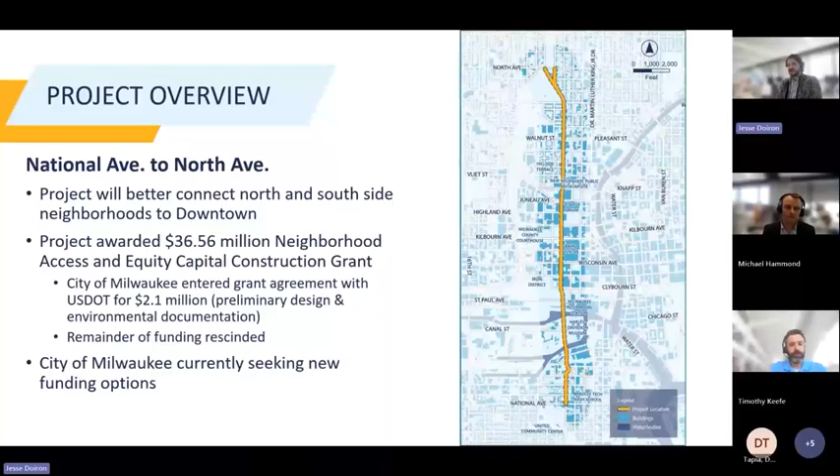So a quick overview of the project. This is 6th Street from National Ave to North Ave. The project will better connect the north and south side neighborhoods to downtown. Initially, this project was awarded a $36.5 million neighborhood access and equity capital construction grant. However, the City of Milwaukee entered into a $2.1 million grant agreement to cover preliminary design and the environmental documentation. However, as part of the big, beautiful bill that passed last July, the unallocated funding was rescinded, and so we are just finishing the design process with that $2.1 million. Once we get to that 30% design, the City of Milwaukee will look to find other ways to fund the project as it moves forward.

This is called 6th Street Next. We're using the past and the present to now inform the future. So here we have a picture of 6th Street then. We have 6th Street now, and then we're looking forward to 6th Street next.

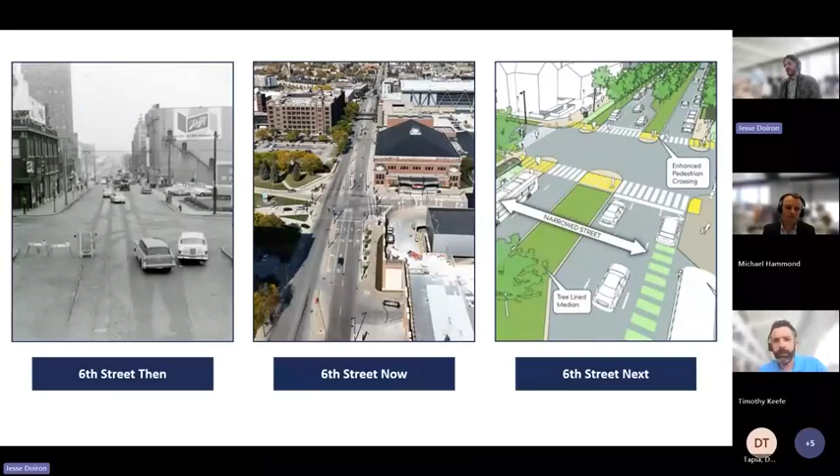The project features: we're trying to improve pedestrian accommodations, add new transit lanes and enhance stops wherever feasible, fully separate bike lanes wherever feasible, increase the tree canopy, landscaping, and other green infrastructure. We want to right-size the roadway and do complete pavement reconstruction for a portion of the corridor.

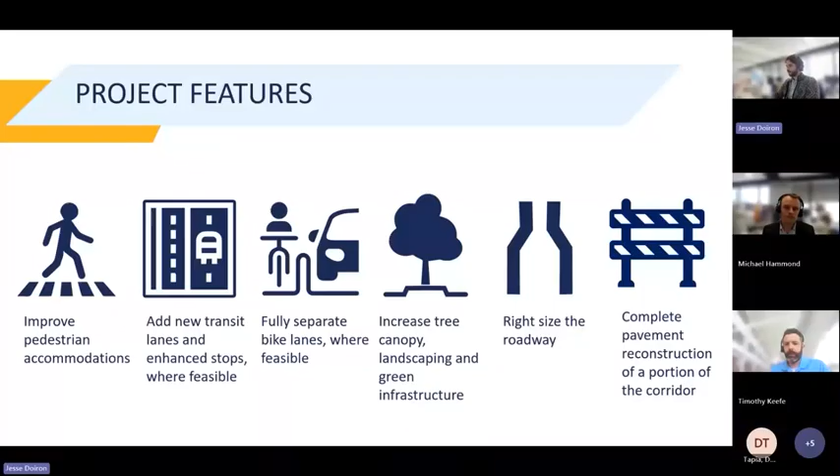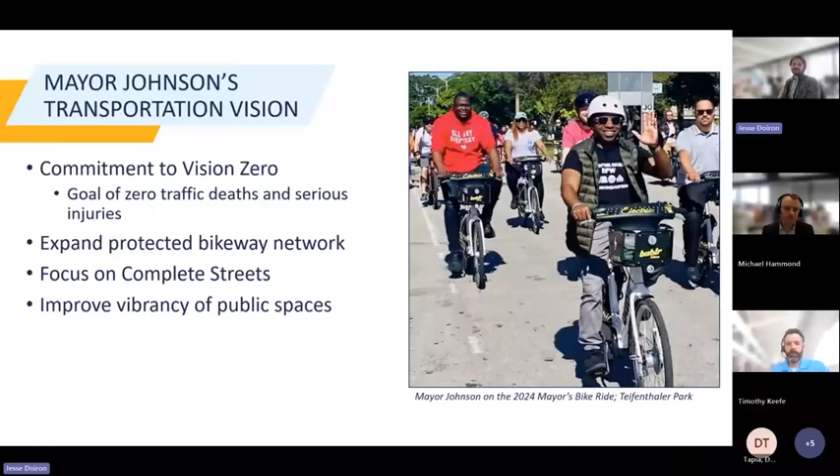This is part of Mayor Johnson's transportation vision and his commitment to Vision Zero, a goal of zero traffic deaths and serious injuries in the City of Milwaukee. We're also supporting the vision of expanding the protected bikeway network, focusing on complete streets, and improving the vibrancy of public spaces. This project comes out of the Connecting Milwaukee Downtown 2040 plan.

It was identified as one of the catalytic projects, turning 6th Street into a complete street, which would be redesigning it as a priority transit and enhanced bikeway. Throughout that process, residents supported designing streets that are walkable, safe, and have more space for people walking and less space for vehicles. It's been identified on the bike priority network and the transit priority network.

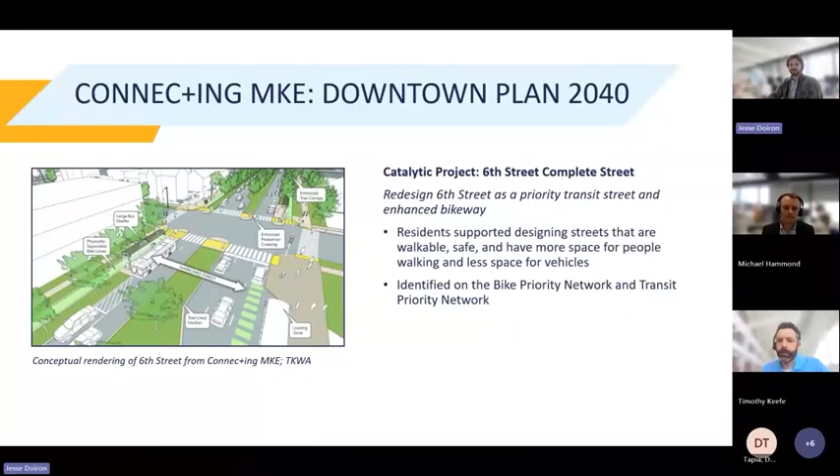So this is our second round of public involvement. In our first round, we have a brief summary of what we heard. We engaged with stakeholders both at the City of Milwaukee and with MCTS.

We heard that the corridor is not cohesive, but it does serve a variety of uses and users. There's a lot of potential throughout the corridor for identity, gateway, and gateway signage. And then certain intersections feel very large, especially Michigan, Kilbourn, and McKinley.

We engaged with a variety of stakeholders along the corridor, including the Baird Center, Downtown Milwaukee, MATC, the Nature and Culture Museum of Wisconsin, Walker's Point Association, just to name a few. And what we heard repeatedly is that 6th Street is a barrier for people that are walking, so better crossings are needed. Corridor would benefit from pedestrian wayfinding signage, and this corridor serves as an important access point for large events, for deliveries, and for customers.

A brief summary of the engagement we heard from our first round of public involvement meetings is that 6th Street is an important artery to move people through the city, but the street feels unsafe. Vehicles move too fast and the pavement quality is poor. So using that information, we moved through a selection process and the preferred alternatives.

So I'll pass it over to Mike to go over how we selected our preferred alternative.

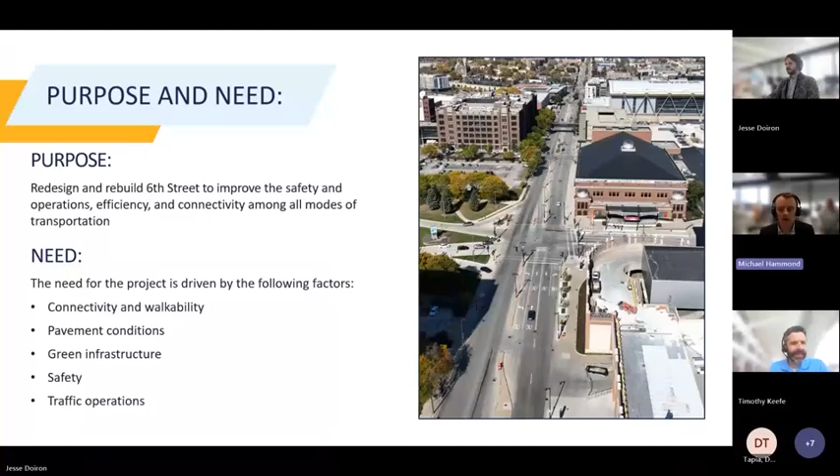And then finally, traffic operations, certainly acknowledging that this is a roadway with vehicular traffic on it, and across the different segments of the roadway, there is different jurisdictions of who maintains the jurisdictional operations of that roadway, and that's something that we've also been keeping in mind as we evaluated the various alternatives.

So we've talked a little bit, as you've heard me mention segments a couple of times already. The way we've thought about this project, both at the first public meeting and in this second phase of public engagement, as we looked across different alternatives, was really dividing the corridor into 4 segments, starting at the far southern end from National Avenue to the roundabout as the first segment.

And then you see that purple segment in the map, roundabout to Clybourn Street being the second segment, then red Clybourn Street to McKinley, and then the final segment to the north, McKinley to North Avenue.

As Jesse notes here on the slide, there will be Q&A. So basically after each section, what we'll do is run through the alternatives that have been proposed, where our preferred alternative landed, and certainly time for Q&A. Jesse notes the virtual comment form on our website.

And then I'll also note that on that same website, we did host an in-person public meeting last night. For those of you who weren't able to make that, we do have materials from that public meeting also available on the website for review that mirrors some of the info that we're sharing in today's presentation.

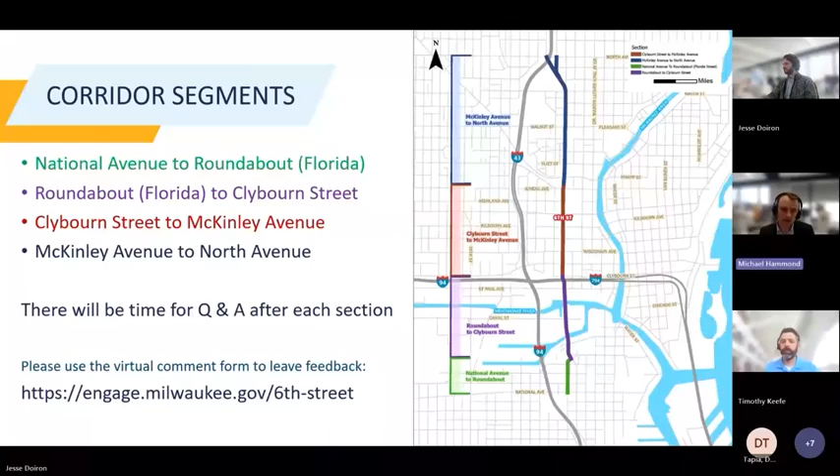Both of those speed stats are really likely influenced by the surrounding context and land use of this corridor, as it is somewhat different from the other segments that we're looking at.

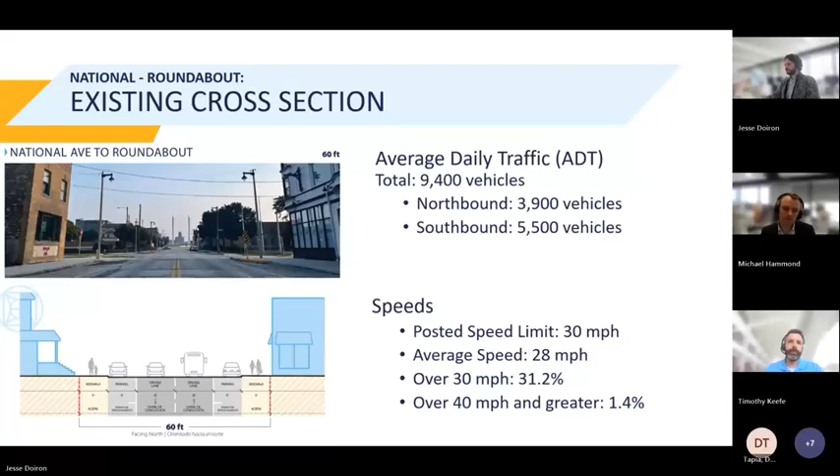So when we thought about potential solutions or alternatives for this segment from National Avenue to the roundabout, very similar. On the far left side, you can see what we called our green corridor, one travel lane in each direction with some space for green infrastructure on one side and then one side having parking. So really allowed for some flexibility in terms of how that curbside space was used.

The one on the right, very similar. It's called wide sidewalks because it would widen the sidewalks and then somewhat reduce the available space for green infrastructure and parking, but still allowing for some of that flexibility between those two based on the surrounding land uses.

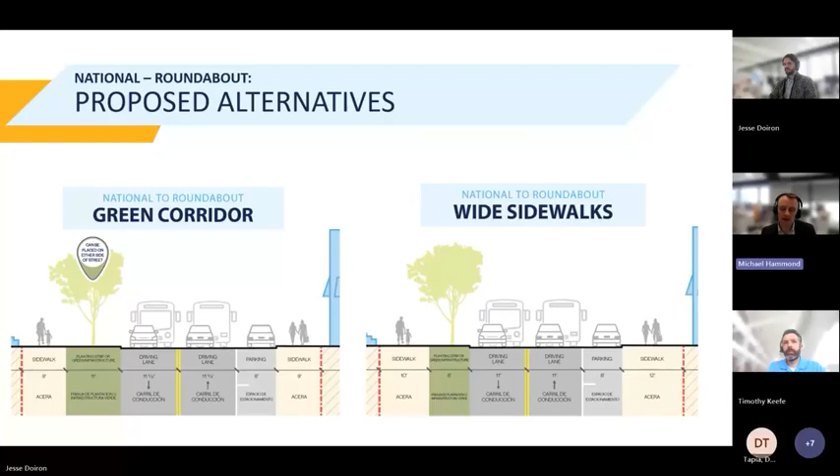So next, this gets to our selection criteria. You heard me talk about the purpose and need. There'll be a slide like this for each segment, so I'll just introduce you to the idea on this one. On the table on the left-hand side, as it notes on top, purpose and need. That goes through all of our purpose and need factors, and then assesses each alternative to determine whether they meet the purpose and need for the project.

As you can see with this segment, really both of the alternatives were very similar. They all meet the purpose and need of the project and the different need factors that we have.

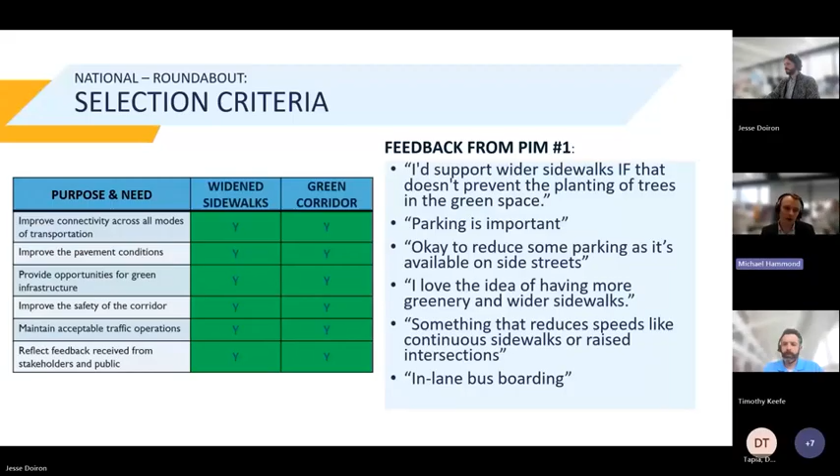On the right-hand side, you can see some feedback we received from the public at our first round of public engagement. Certainly a lot of interest in wider sidewalks, but also acknowledging that parking and greening the corridor were other priorities for folks that visited us at our first public involvement meeting.

So we took all of that and identified a preferred alternative. You can see on the left-hand side is an illustrated cross-section. On the right-hand side is a conceptual 3D rendering of the preferred alternative.

And really, when you think back to those alternatives that we proposed, what you're seeing on the screen is really a hybrid or a combination of both. So it has one travel lane in each direction, maintains space for parking and green infrastructure on the sides, as well as widening that sidewalk. You can see that area in blue that's identified in the cross section.

That's really what we've identified as flex space. And you can see that playing out within the conceptual rendering as well, as we provide space for parking, but in certain locations that could also be turned into green infrastructure or areas for planting. Again, really meeting the need that we heard from folks from a parking perspective while still greening up the corridor.

The last thing I'll note in the conceptual rendering is just on that rendering there on Pierce Street, you will see a lighter gray concrete there that does indicate a raised intersection. It is something that we've looked at as a project team across the corridor at various unsignalized intersections, really calming the traffic, reducing speeds, and improving the overall safety of the street.

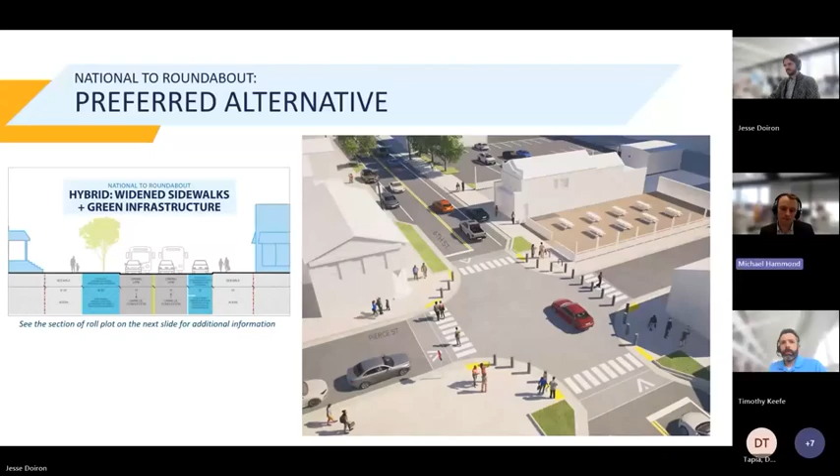So Jesse's got this summary slide pulled up here. You can see the cross section of that rendering again. And then what you see in the center of the screen is a snip from our roll plot, a plan view of the design as it exists at this preliminary phase. We'll pause there and happy to answer any questions about this particular segment.

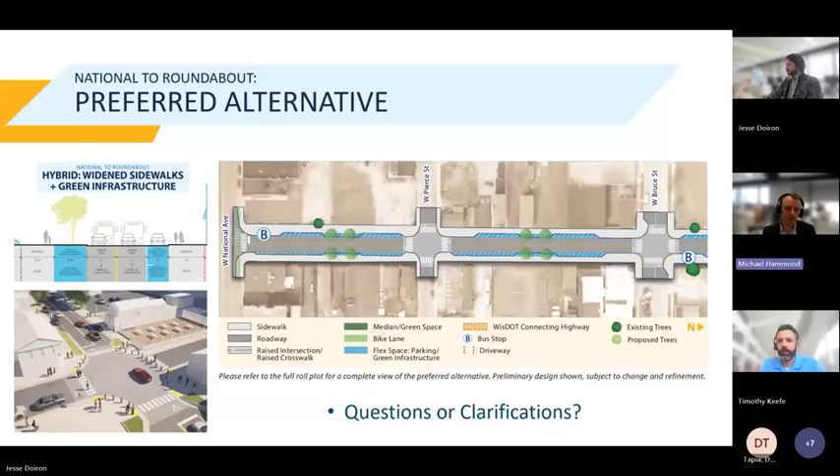Second segment, as noted, was from the roundabout north to Clybourn Street. Same format as we just went through with the last segment. On the left-hand side of the screen, you can see the existing conditions. This existing today photo is taken looking north from Canal Street. You can see the cross section also matches that location, in terms of 2 travel lanes in each direction with a striped bike lane.

I'll note that there is a variation in the cross section that exists within this segment. North of Canal is what you see on the screen. To the south of Canal, the city has recently completed a traffic calming project along that stretch that reduces it to 1 travel lane in each direction with some jersey barriers separating the bike lane from traffic.

On the right-hand side of the screen, you can see the average daily traffic again, 14,000 vehicles, quite a bit higher than that last segment, and some speed data in terms of the posted speed limit being about 30 and average speeds being over that at 34 miles per hour, with 77% of the traffic we saw going over that 30 mile per hour mark.

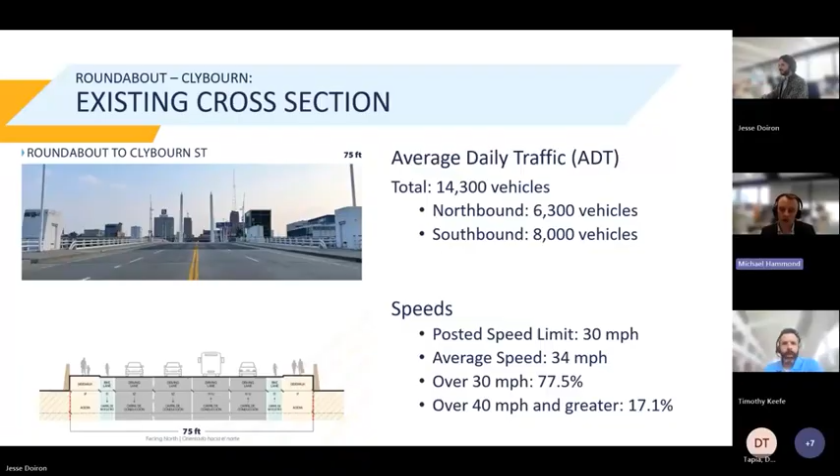Next slide goes over the proposed alternatives that we shared at our last phase of public engagement. They're all fairly similar to each other, so I'll highlight some of the major differences. Starting at the top, a fairly traditional roadway cross-section, one travel lane in each direction with one bike lane on each side. You can see a striped barrier separating that traffic from the bike lane, and then the sidewalk. This segment is on a viaduct or bridge for good portions of it, so we are somewhat limited in terms of improvements. That serves as the foundation for what that sidewalk looks like, and you can see some bridge elements shown to indicate that difference within this segment.

I'll transition to the bottom left there. That's the second alternative. You can see it provides a two-way bike lane on the west side, as well as a one northbound direction bike lane on the east side. The main impetus behind that two-way bike lane was this segment connects to the Hank Aaron State Trail south of Canal Street with a looping ramp. We heard from a lot of stakeholders that they were very interested in a seamless connection to the Hank Aaron State Trail. So we felt that two-way bike lane would provide that connection, not requiring people, regardless of their direction of travel, to cross the street to get into an additional bike lane.

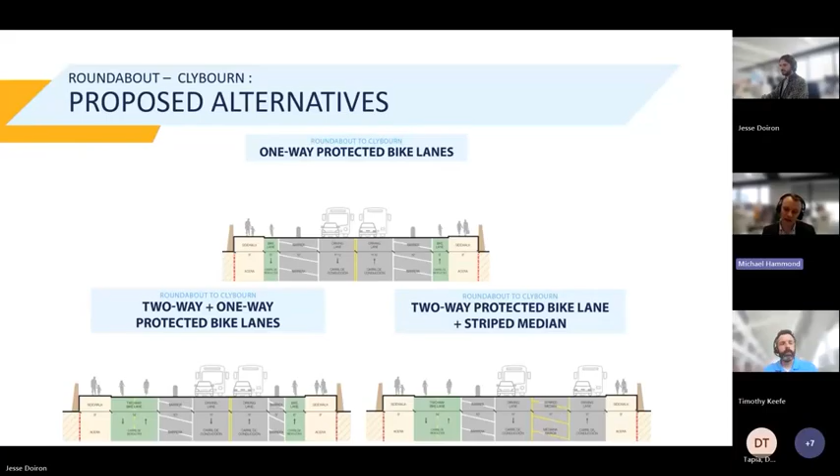They can stay on that west side of the structure to connect to the Hank Aaron State Trail. On the right side, the third alternative we looked at was just that two-way bike lane, without that single northbound bike lane. In order to use up the space in the roadway cross-section, you can see striped medians, sort of paint or pavement markings that would indicate that striped median outside of the intersection area.

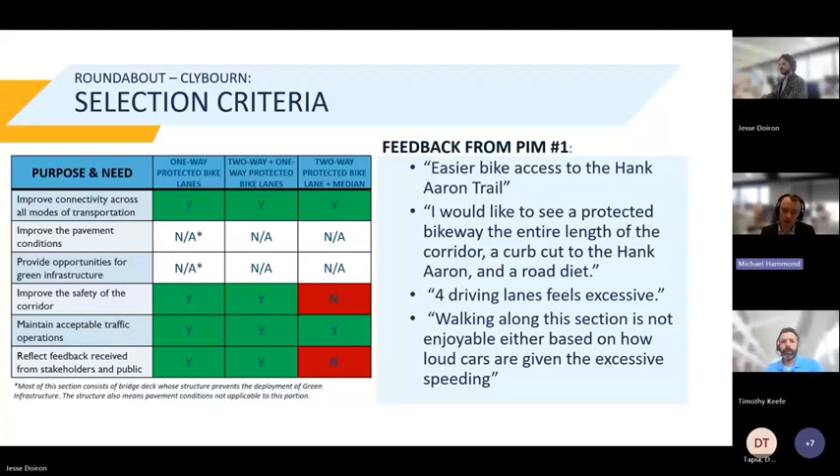But south of Canal, we are looking to implement that two-way bike lane on the west side paired with that northbound bike lane on the east side. Again, really focused on providing that seamless connection for folks using the Hank Aaron State Trail, which continues along Canal Street and makes that connection south of Canal Street.

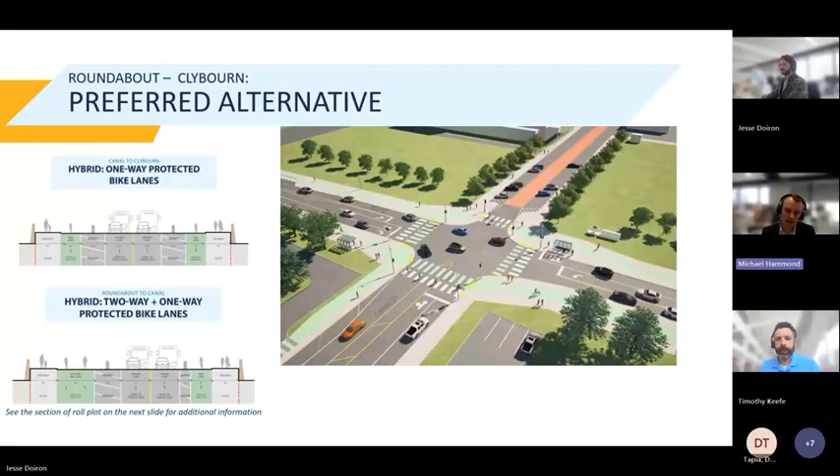The first one: what's the sentiment for installing BRT-type bus boarding platforms at stations along the corridor with high ridership? Is there anything preventing that as an upgrade?

Yeah, it's a level of detail that we haven't gotten into yet at this design level, but certainly for good stretches of the corridor, we do envision in-lane bus stops, and level boarding platforms or BRT-type boarding platforms could be considered at high ridership stops.

And then another question is, when will the roundabout design be discussed, including how the two adjacent segments interact with it? Obviously, this roundabout has an enormous impact on how people move through and think about moving through the 6th Street corridor. Yeah, that's a great question, and it's always hard for our project team in terms of how much detail to show in a virtual setting like this.

I would first point to the roll plot design on our website that shows the details of the entire corridor in terms of how different segments interact.

I would say, in general, with the roundabout noted to the south of this segment, that's something our team has taken a look at. The preferred alternative incorporates basically a formalization of some of the improvements the city has made out there recently in terms of that roundabout. So the preferred alternative does envision that roundabout staying.

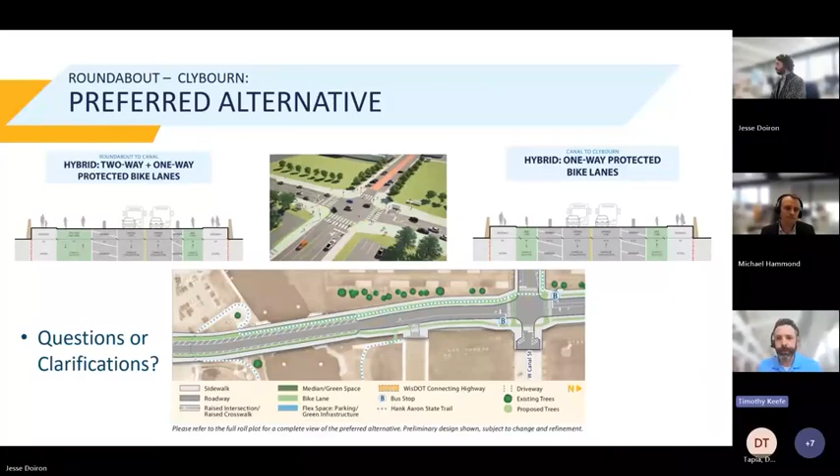So there's no typical cross-section in terms of the width that's out there. But in general, we do see two driving lanes in each direction, parking along some stretches of the corridor, and various levels of sidewalk width.

In terms of daily traffic, around 15,000 vehicles, by far the highest traffic levels we see across the various segments are in the downtown segment. Speeds again: posted speed limit is 30 miles per hour, and we're seeing an average speed of around 33. 61% of traffic is going over the speed limit, and close to 20% going over 40 miles per hour.

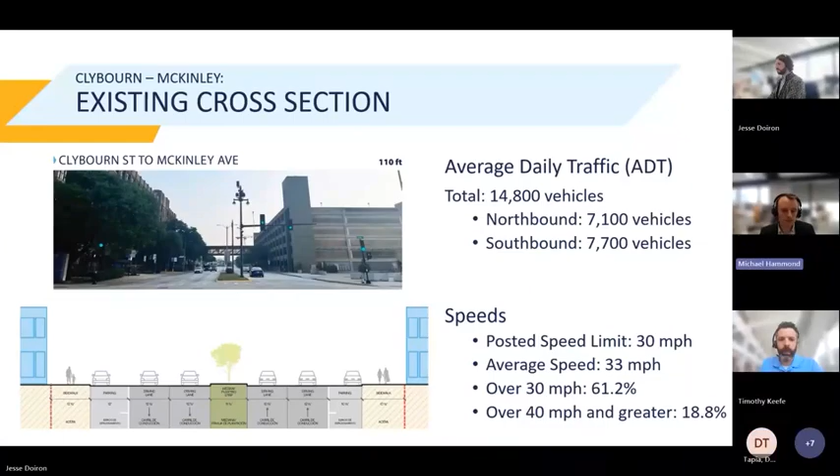In terms of the proposed alternative, we looked at quite a few in this segment. I'll cover the top two and then the bottom two. The top two really reflect what we heard from stakeholders throughout this process: an interest in dedicated transit lanes, but also an interest in protected bike infrastructure within this corridor. You'll see across both of those alternatives on top - I'll start on the left side.

You can see there's center-running dedicated transit lanes.

That would mean buses have their own lanes in the center of the roadway, one travel lane in each direction, and a protected bike facility at sidewalk level. In the alternatives shown, the bike lanes could be on each side or paired together on one side — we had flexibility there across these alternatives.

Moving to the second alternative, outside transit and protected bike lanes: very similar, but here the transit is on the outside lanes, with that protected sidewalk-level bike facility on either both sides or together on one side, still one travel lane in each direction. The bottom two alternatives differ in that they don't have one travel lane in each direction, but two travel lanes in each direction.

In the bottom left corner, you can see four driving lanes and protected bike lane. The name is fairly explanatory: two travel lanes in each direction and protected bike lanes that are sidewalk level on each side. There would not be dedicated transit lanes under this alternative.

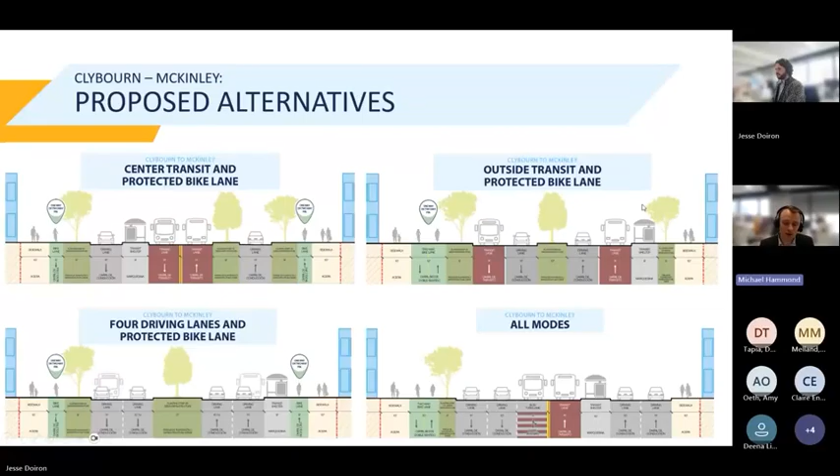One thing I'd call attention to in the all modes alternative is somewhat limited space for green infrastructure and planting. That was really something we heard from a lot of stakeholders, and it was a key part of our purpose and need.

With limited spots for medians, limited space for pedestrian refuge, it really impacted connectivity for folks crossing 6th Street, and limited opportunities to green the corridor with planting and green infrastructure. That wide cross section also concerned our team about increased speeding in the corridor and therefore not improving safety. So all modes was not considered when compared to the other three.

I'll handle the two on the left-hand side that provided dedicated transit lanes. As we talked to stakeholders and the public, and coordinated with Milwaukee County Transit System, we understood this is a key spine of the transit system. So we did look at options providing dedicated transit lanes. Unfortunately, one travel lane in each direction to allow that raised concern for the traffic operations out there.

This stretch within downtown 6th Street is called a connecting highway, so it's under the jurisdiction of the Wisconsin Department of Transportation in terms of their preferences and standards for operations and traffic. The one travel lane in each direction did not meet those operational thresholds. So by process of elimination, the one we've decided to move forward with is four lanes plus protected bike lanes.

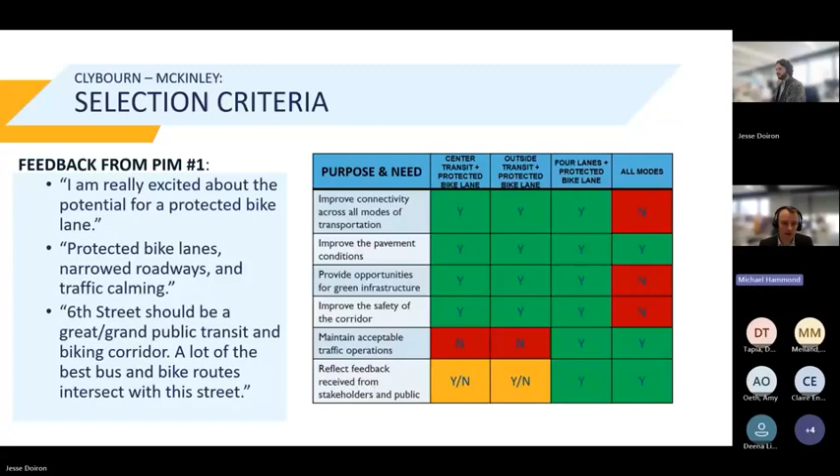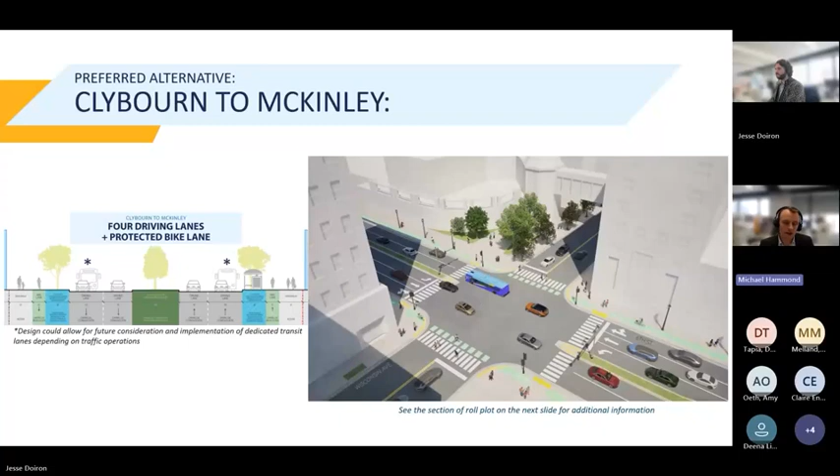Again, this is our summary slide. Jesse's got a snippet of the roll plot on the screen as well, and the full version is on our website. We're certainly open to comments or questions from folks.

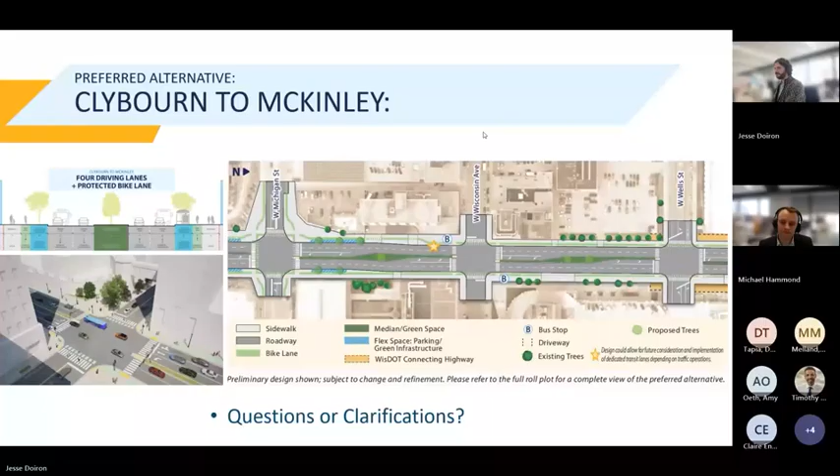Okay, last but not least is the northern segment. This goes from McKinley all the way to North Avenue. You can see the existing photo on the left, cross section below that - 2 travel lanes in each direction, on-street bike lane and parking, as well as planting strip and sidewalk in some locations. Got about 11,000 vehicles here, so less than in that downtown segment.

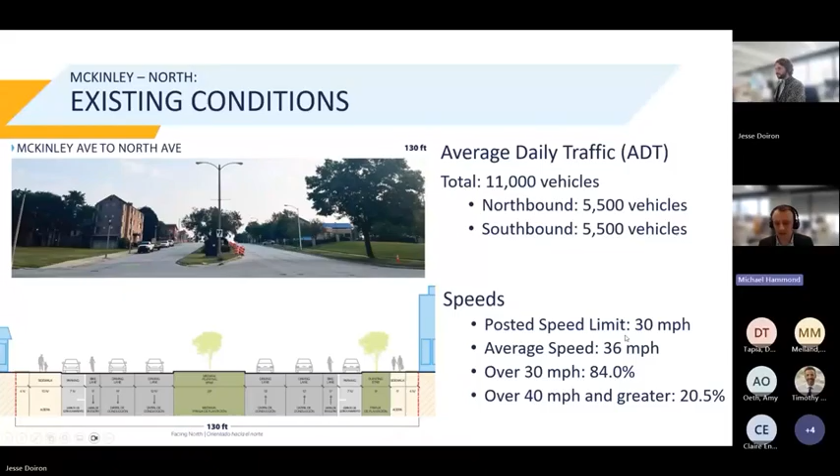From a speeding perspective, posted speed limit is 30 here. We see quite a bit of speeding in this location - 84% of traffic going over the speed limit, 20% going over 40 miles per hour or greater. I'd note that the speed data in particular was collected where you see that photo taken right at the bottom of the hill, so that change in grade is likely influencing some of the speeding we're seeing.

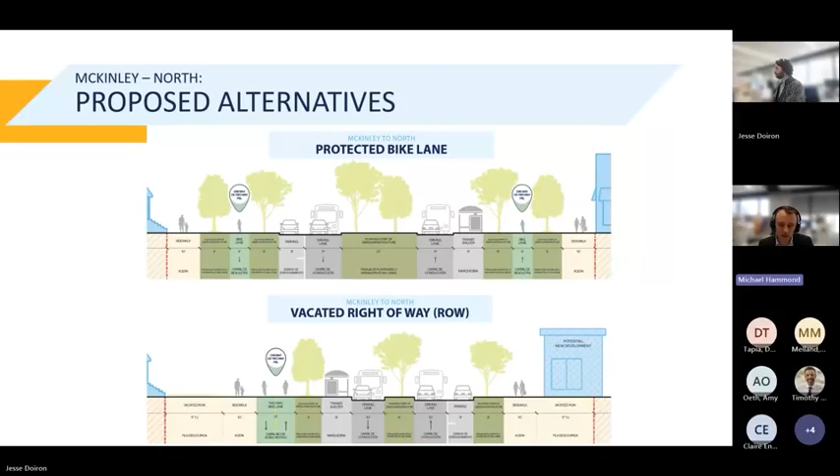With 1 bike lane in each direction, or could be paired to be bidirectional bike lanes on one side. Below that is really something that when our team started to take a look at the top cross section, we identified - wow, there's a lot of space out here that we don't necessarily need to utilize all of it. So this looks at a somewhat narrowed cross section to still provide the same cross-section elements for each mode with 1 travel lane in each direction and protected bike lanes, but then identifying is there the potential that right-of-way could be vacated and given to other uses along the side of the roadway to use up some of that excess space.

How would we set up that land in a way to make sure it could be maintained for a vibrant community into the future? Based on that feedback, we have identified that the protected bike lane option would be the preferred alternative moving forward.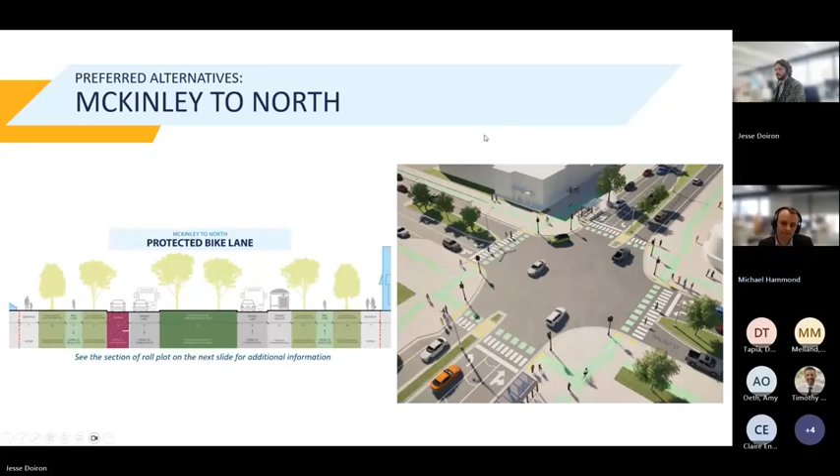So here we are at our summary slide. Jesse's got the snippet of the roll plot that shows you how this design gets passed throughout the corridor. Happy to answer any questions or receive comments from folks on this segment.

All right, as we wait, I think we can just go on to our final section, 4F.

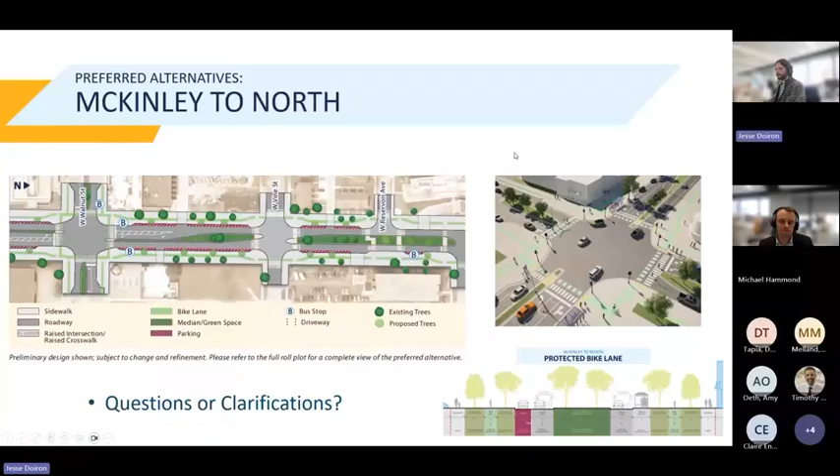Section 4F, as Jesse referred to it, is a section within the United States Department of Transportation Act which, as noted on the screen, provides consideration of park and recreational lands. As part of the National Environmental Policy Act, NEPA, that I referenced earlier, one of the key things our team is working on right now is to finalize that NEPA document. As part of that, we need to identify potential impacts to recreational resources and provide the opportunity for the public to comment on some of those impacts.

There are really two potential impacts to 4F resources within this corridor. On the left-hand side of the screen, you can see James W. Beckum Park, at the very northern end of the project. That's a very small potential temporary easement for grading - an estimated 0.04 acres, really just a strip along the sidewalk for us to reconstruct and replace that sidewalk as part of this corridor.

The Hank Aaron State Trail, for those unfamiliar, is referenced earlier as being in the middle of the corridor where it intersects with the viaduct. A temporary detour would likely be needed during construction as we implement some of these improvements. We are coordinating quite closely with Wisconsin DNR around potential detours that would be needed during construction.

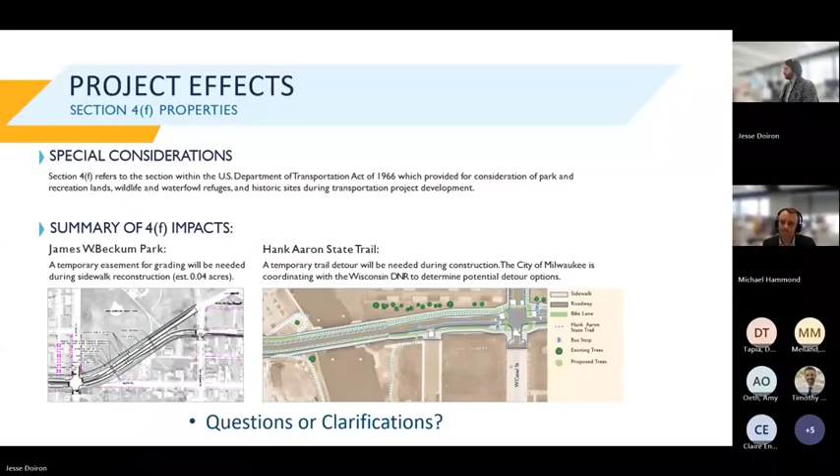And how long are we accepting feedback on the preferred alternatives? I think that's not on our final slide, but we are accepting feedback until May 14th on the online comment form.

Okay, we can let more questions filter in if there are any. Jesse's got the slide pulled up. As noted a couple times, there's a comment form on our website. A lot of the presentation materials we shared today, as well as exhibits and roll plots from the public meeting, are on the project website for review. And if there are more specific questions, that email is available as well.

One question just came in. Throughout our public and stakeholder engagement, has there been any segment of the public that has been vocal about maintaining all traffic lanes and keeping 6th Street a major motorist corridor?

I would say in general, the words 'major motorist corridor' were probably not used by the stakeholders we interacted with. In the downtown segment, I think we did hear some stakeholder and public feedback around concern over alternatives that transition to one travel lane in each direction. We've also heard from folks concerned about turn lanes in certain locations, particularly at Canal Street on that second segment, with quite a few conversations around queues that occur there. So I don't think that was a major theme, but we've definitely heard some feedback about keeping considerations open for accommodating vehicular traffic.